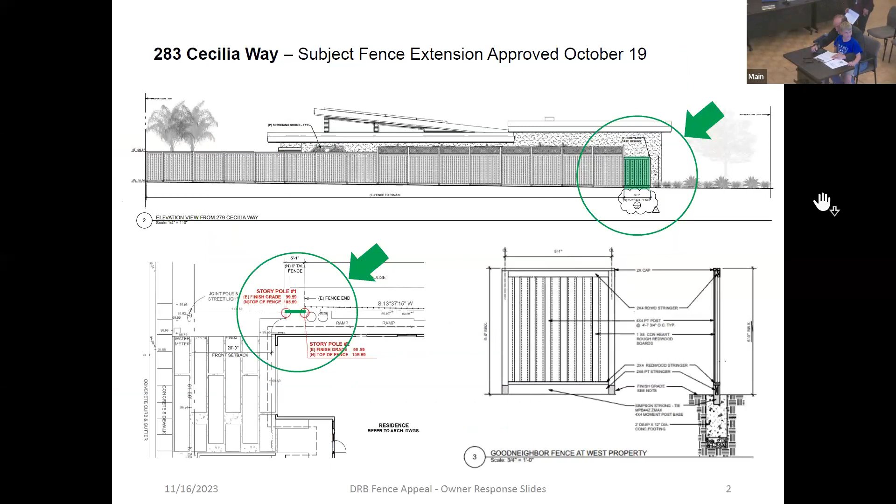So we're requesting a new 5 foot section of a good neighbor fence that's 6 feet tall and matches the fence all around our property. This fence extension is necessary to connect the existing fence to the new side gate approved during the July 20th hearing.

Unfortunately, nothing with our project has been easy. Despite your conditional approval of our project on July 20th, the appellant appealed your approval, requesting that we lower our roof eave an additional 3 inches and move the external hydro loop tanks.

We agreed to both conditions before the September 6th town council meeting, and this slide shows that reduction of 3 inches on the garage side roof.

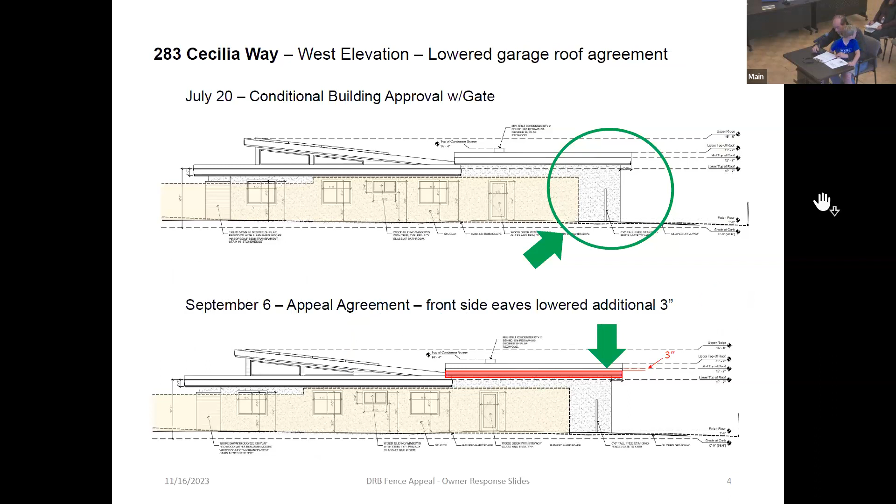This illustration of the fence plan being appealed tonight is in contrast with the variance application that was denied.

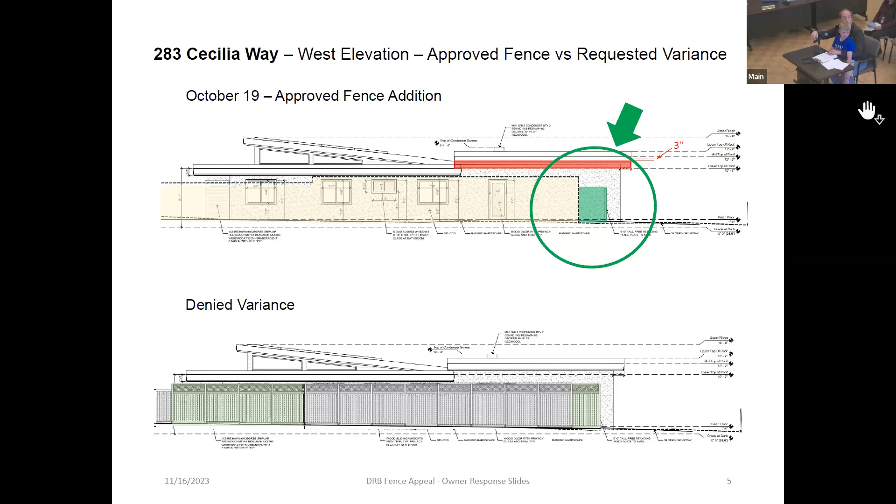So for context, here's a close-up of the area. Actually, I can just say next slide. So here's a close-up of the area taken before our house was demolished.

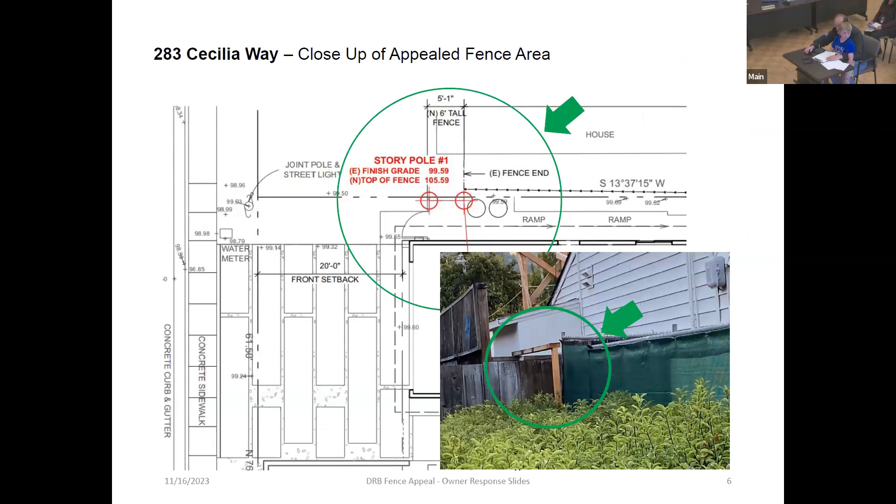Next slide, please. Here's another slide showing the story poles in relation to both the appellant's property and ours. Next slide. Here's another slide showing the story poles in our 2 properties from above, and the area in question is encircled in green there.

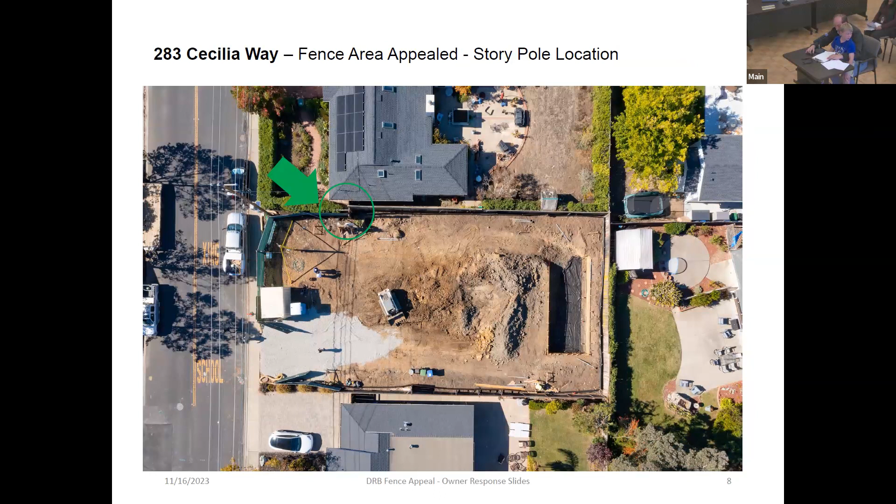And then you can see the taller fence that goes back 48 feet, and then the remainder of the fence behind that. Next slide, please. A closer view of the area in dispute.

Next slide. Once again, the appellant has tonight again complained about another facet of our project, citing design, safety, and noise concerns. Next slide, please. Specifically, the appellant in her long email has highlighted several specific concerns that run around our neighborhood, vilifying our project once again. I'll now address each of these concerns.

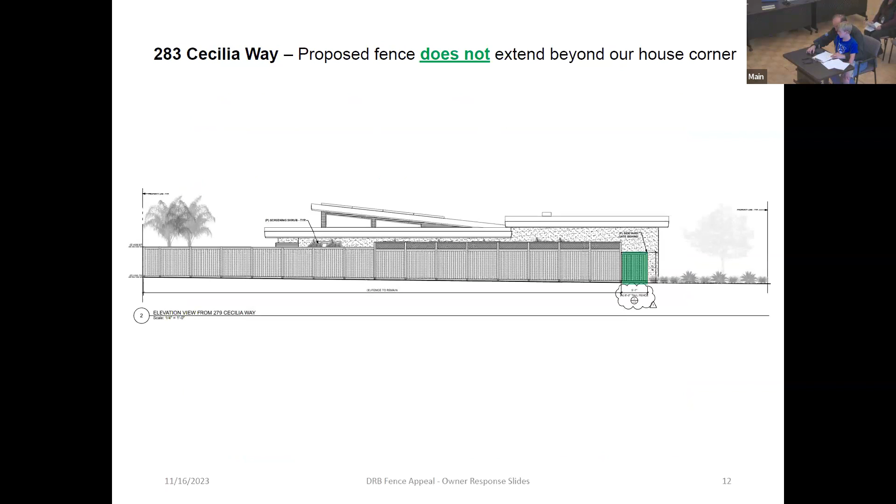Next slide. Our fence extension does not extend beyond our house corner, as she alleged. Next slide. Our fence does extend 18 inches beyond the appellant's house, but this is behind her 5-foot hedge, and it's less than 1.25% of the entire property length, so it's pretty insignificant.

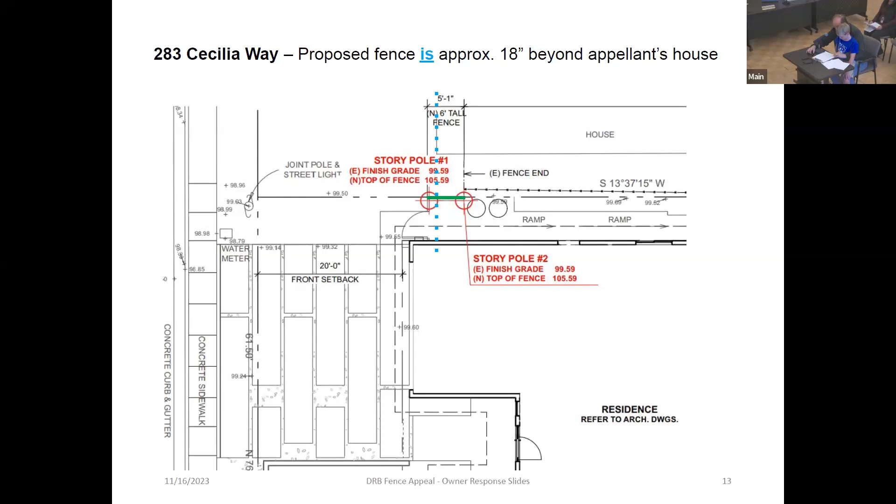Next slide, please. Our proposed fence extension will not be awkwardly tall, as it is here. We drew it here next to what the future house will look like. It will be 1 foot above the appellant's hedge. Next slide.

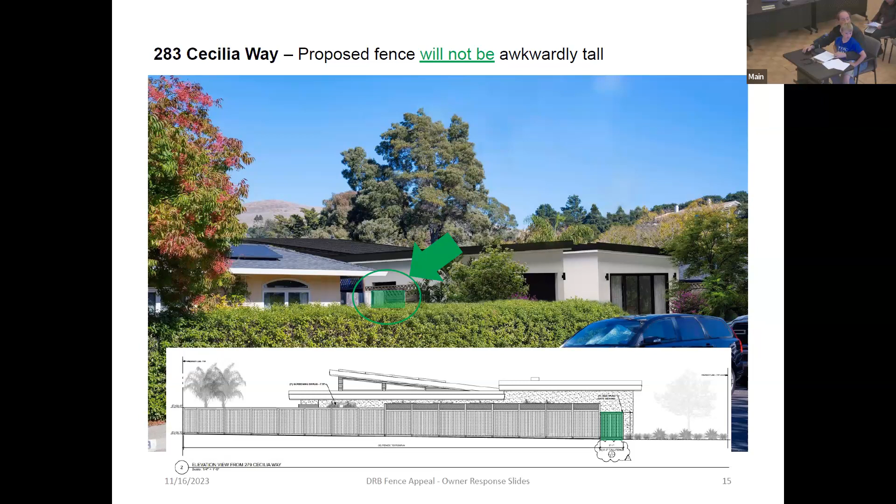It'll be set back one, and it will be 2 feet shorter than the appellant's own fence between our properties, as indicated in the slide below. Our proposed fence extension will not significantly obscure the view of the appellant's side gate from the street more than her own hedge.

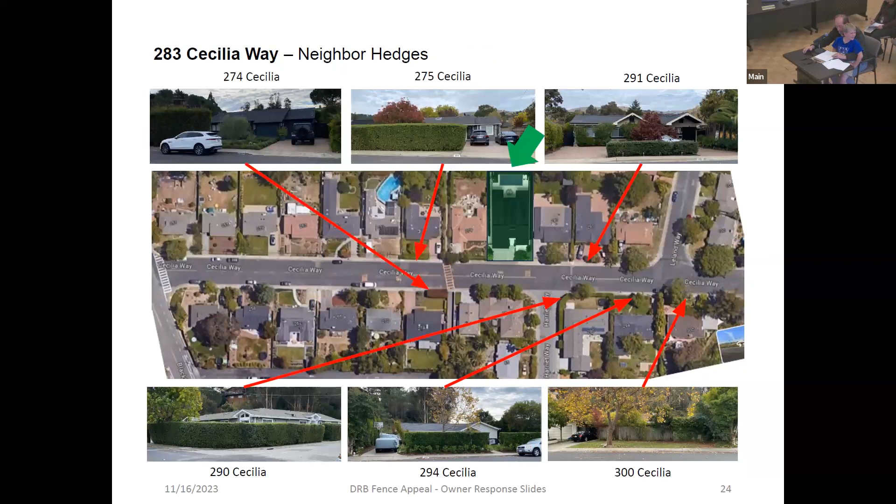This is 300 Cecilia Way. Next slide, 294 Cecilia Way. Next slide, 290 Cecilia Way. Next slide, 291 Cecilia Way. Next slide, 275 Cecilia Way. Next slide, 274 Cecilia Way. These are all properties in close proximity to our own.

As you may recall, the appellant has had countless problems with our project, and now she's concerned about the location of our garbage cans. We've never moved where the garbage cans were going to be on our property since the beginning of our plans. If you may recall, she was concerned about potential sounds from the external Hydroloop tanks we had proposed. During a July 20 hearing, we offered both to mechanically insulate the lids with 2 inches of foam and move the tanks.

Following that hearing, she appealed your approval, citing noise from these tanks again. Consequently, after much discussion among our team, we elected to remove the water conserving Hydroloop system from our program entirely.

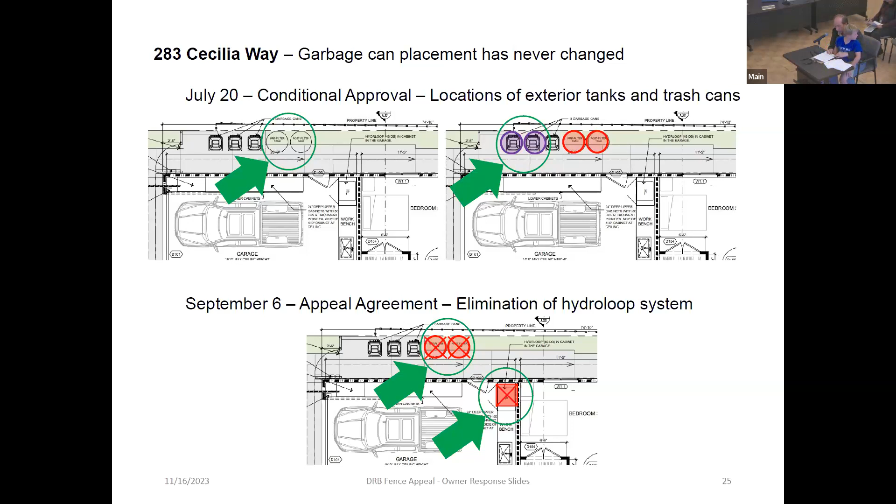I really have no idea what to say about this complaint about our children playing in the driveway from a woman who's saying that this is a family-friendly neighborhood that we're supposed to be protecting.

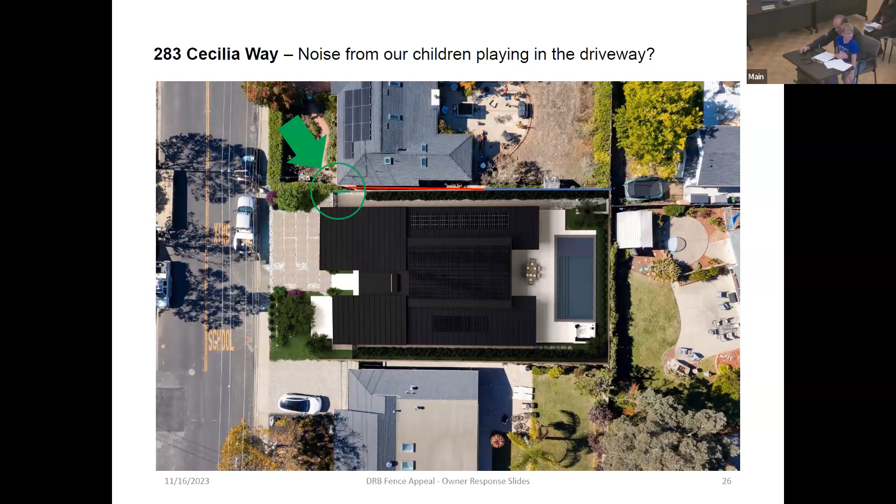You conditionally approved our project. Our project was appealed, and we agreed to our neighbors' change requests again. We applied for a fence variance to address our neighbors' privacy concerns. She blocked that request. We amended our fence application, and it was approved. Now our neighbors are challenging your staff's approval of our fence application.

The appellant's proposed compromises are not compromises, but additional new demands. Her preferred option is to deny the fence extension and ask that we remove our fence back to her fence line, or reduce the proposed gate side fence 1 foot and presumably our gate height too.

We've already purchased the gate. It's being custom manufactured in New Jersey—it's a metal gate, being manufactured right now. That's the 6-foot gate that you approved previously. So this fence is really just linking the existing fence with the gate that you'd already approved.

As I mentioned in the beginning, this should be an uncontroversial matter. So we ask that you please deny this appeal.

Thanks. Next, what's next in the procedure? Oh, do we have any questions? Okay, sorry, we have a question for you. I just had one question.

The story pole right now is not flush with the existing fence—can you speak into your mic? Sorry, right now when I view the story pole, it doesn't look like it's flush to the existing fence, it's offset by like 4 or 5 inches. That's correct, because her fence is not on the property line, it's on her property. So our fence is on the property line, but her fence goes into her own property.

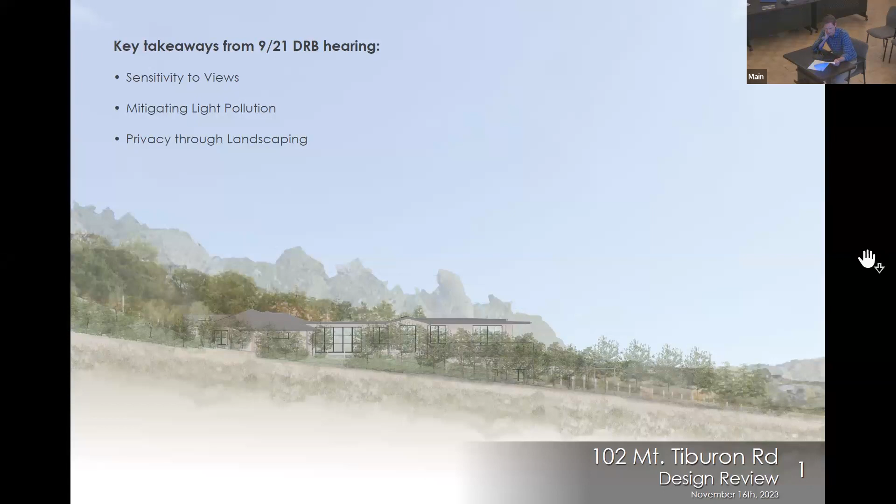I'm also trying to not repeat too much from my first presentation, but with Suzanne being here for the first time, there may be some repetition. I'm fine with that. Could I have it for the laser pointer though? Thank you.

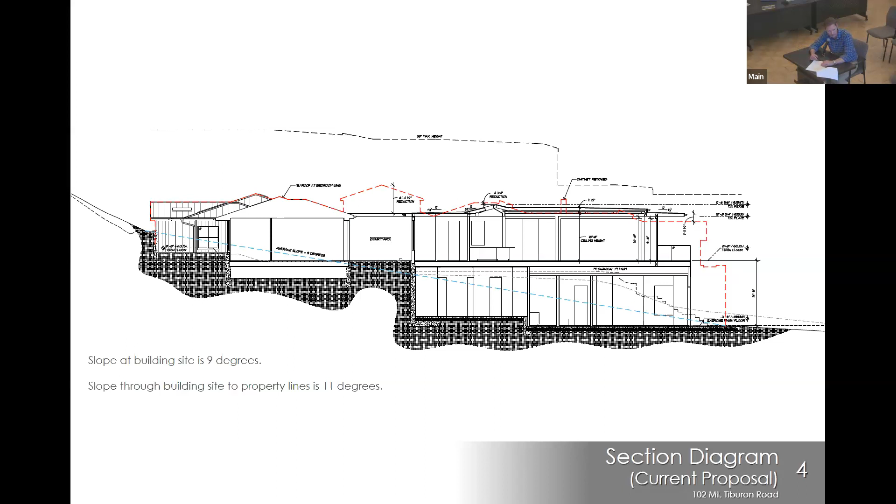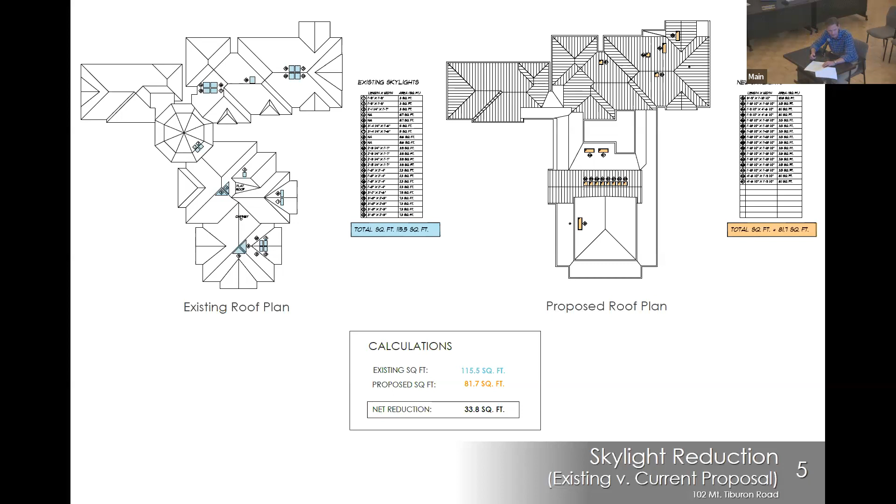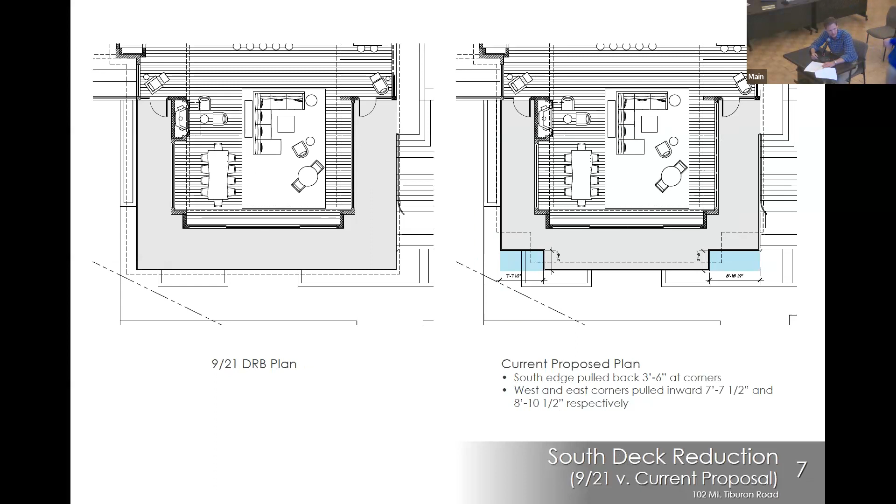We also received letters of support, I'll add, in addition to satisfying the Chu's concerns and a letter that you received from them. We have letters of support that came from 80 Mount Tiburon Road, Mark Evans at 101 Mount Tiburon, and a neighbor at 98 as well. So that's part of the outreach that we've done.

Next slide, please. This is just the two side by side. Next slide.

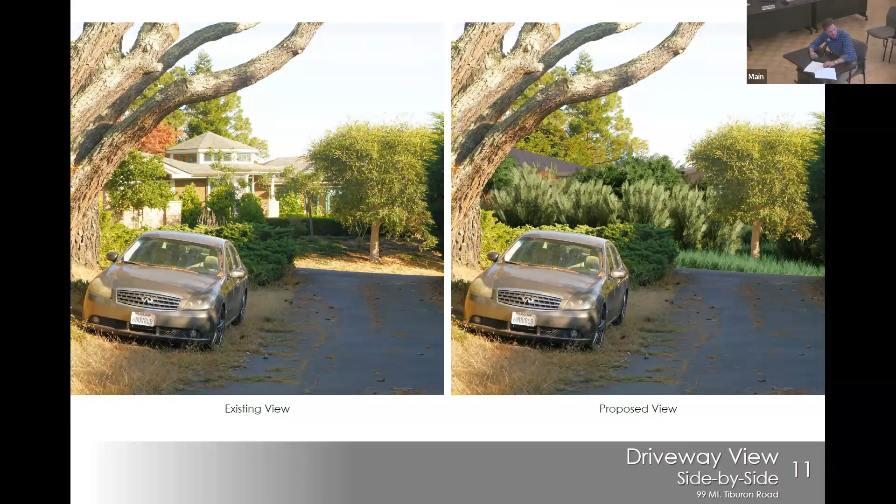Wanted to show a benefit to 99 Mount Tiburon Road as well. This is not something that we really had much dialogue with them about, but the current view looking down their driveway at the property is quite open, quite exposed. Here you can see the very tall tower that we propose to remove, and then the ample screening that honestly is going to be lovely for the applicants. It's something they want, it's not a situation where they're grudgingly doing it.

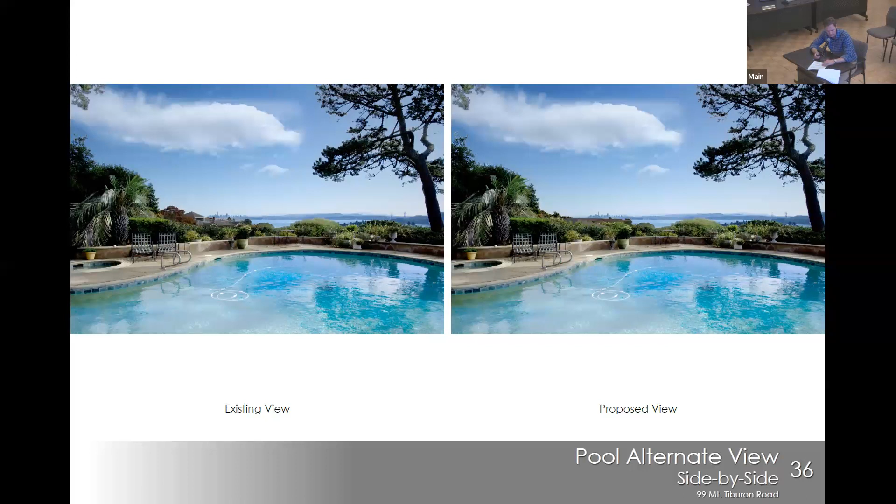These are just side by side. Next slide. And let's go to the next one. This is just side by side.

So I want to close by saying that the main design goal for this project, a real challenge, has been to achieve a cohesive floor plan with good flow. Remodels are a reaction to the frustrations people encounter every day living in a home. For this house, it is the fact that there are stairs breaking up what is a ring of rooms as the main social space. Our clients desire a better space for their young children and see step removal as a major benefit after experiencing several years of knee rehabilitation.

What we have developed and presented is our best effort to maintain balance between those goals with the desires of a neighbor to maintain the portion of the city skyline view they currently benefit from over the roof of the existing home. Our intent tonight has been to take the story pole process a step further and create as accurate an image as possible of how our proposal would change the current view from the neighbor's property.

It is our contention that these images demonstrate not only sensitivity, but also a high degree of diligence and concern to be respectful of the view and transparent in the design review process, to really give you guys an incredible tool to understand and not have to have a hunch about what's going to happen.

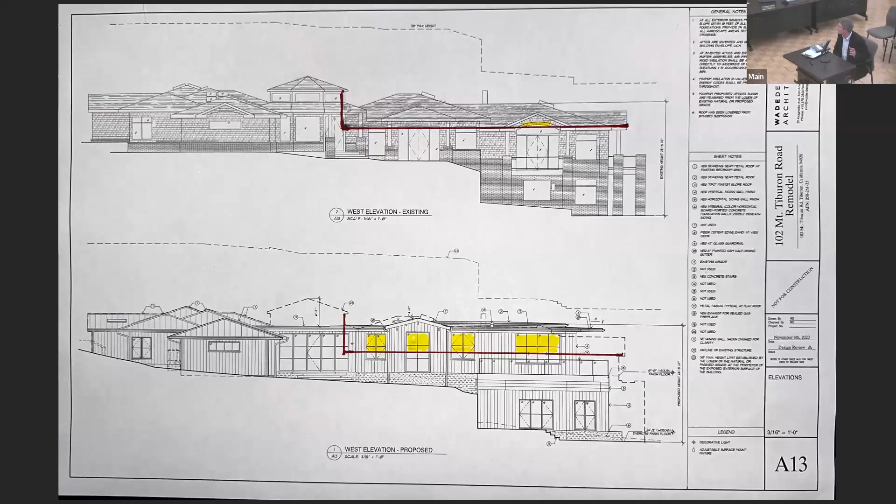This one, yeah. So this is an important concept here. This is the light directed back at the Ordoricio's house because of the change in the design of the roof. And you can see that under the current design, which is a lower roof, part of the part that's visible from their house is roof. Under the new design, the part that's visible from their house will not just be a higher roof, but also these lights, these windows looking in their direction. That's light pollution directly in their direction. It's not about net changes in the windows, net changes. It's about the changes that directly impact the neighbors.

Christy mentioned the solar, and I think that's important. On the existing roof, it would be hard to have solar pointed in their direction, on their north side. But with this flat roof, solar is going to be directly on top of the roof. And it's almost, there's no solar as part of this project, but of course, that's a ministerial part of, they can get solar if they want it without going through this process because solar is encouraged. But here, solar would add more height to a height that already intrudes upon the existing views. These are all important considerations that you should bear in mind, along with what has been hard fought and established in the existing views.

There's been a lot of talk about the cupola that they're taking out. As they said, it provides no value to them and it doesn't matter to the neighbors. Their view is looking towards the heart of San Francisco and Alcatraz. That's the view they've always enjoyed, and that's the view that needs to be protected under the design review guidelines. Thank you.

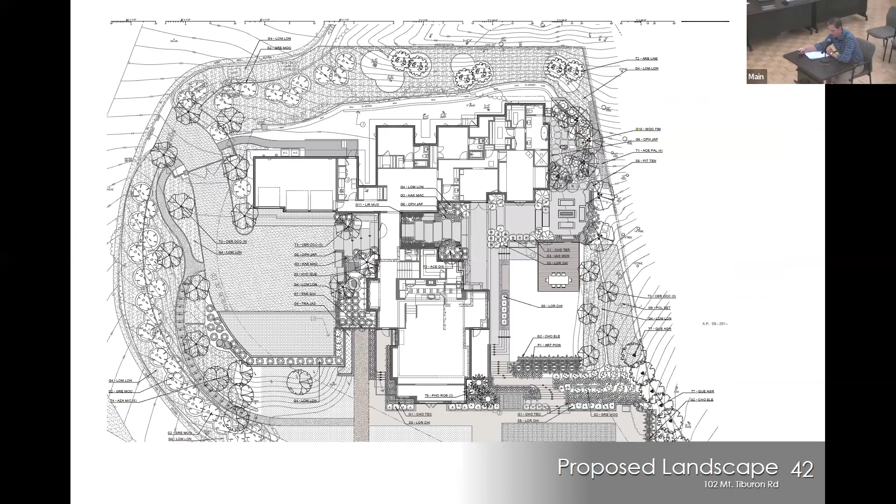Our proposal relies on understanding of trade-offs. This is getting rid of what I imagine isn't something nice to look at, especially with all this talk of light pollution being much higher when they talk about, oh, they're raising the roof 2 feet. No, we're well down—I believe it's 6 to 8 feet below that current cupola height. We're averaging the lower roof lines of this current building.

And like I said, it's an argument of trade-offs. The current view that's afforded is largely of the roof of this existing home, and a flat roof will reduce that bulk. It's accomplishing what our client wants, right?

We actually studied a vaulted roof. We love vaulted ceilings, we love pitched roofs. The view sensitivity here has pushed us to this sort of solution to help maintain the view from 99.

Solar is shown in the package that was sent in, on the roof plan, called out. And if you can go to slide 6, please.

I failed to mention this earlier, but here's the proposed solar location. This is not a new addition tonight—it's in the package we've already presented. It's on the back side of the slope, so as to be respectful of the views, which we understood would be a concern. We can sign up for special clips that make it really low profile on top of the standing seam roof.

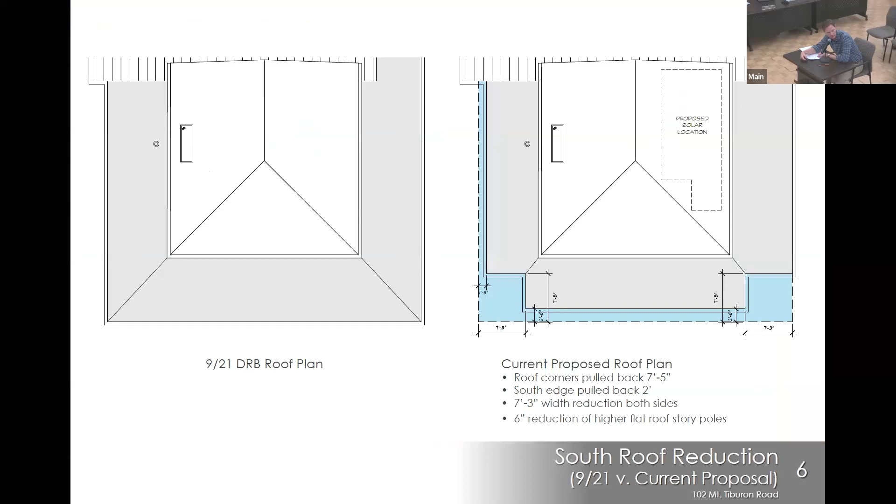Yeah, this is perfect. So here, as we understand from text messages with Gemma Dorcio and our client, these are the concerning windows. We do have ample screening, like our renderings show, that will block those windows, but we are also more than willing to make accommodations to bring down the glass line, to shrink the glass size, like adding an awning here over this window to conceal it from view—a 75 square feet reduction.

If you want to approve of the condition, that's your number that aligns with solutions we've already created. And I think I've covered everything that I heard.

Thank you. Any questions? Yeah, I actually have a question. The skylights—will they be on an automated timing system so that the blackout shades come on?

Yes, Suzanne, we've done this two different ways. One is with a clock, a timer that adjusts with the seasons because it knows when sunset is—so it's tied to that. The other way we've done it is with a light sensor, actually two light sensors, one outside of the building and one inside. So when it switches, there's an awareness between the two sensors that there's more light inside than outside, and it closes the shades.

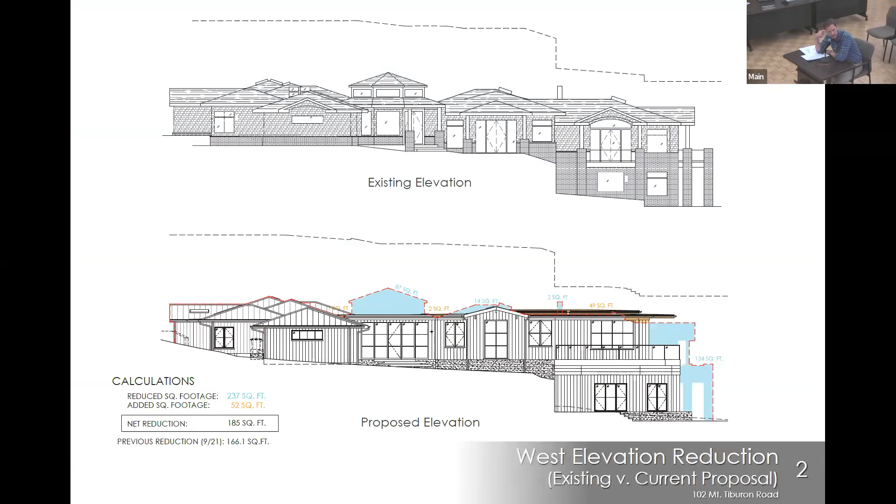What does 75 square feet look like on those three banks? I have an exhibit if the board is interested in looking at it.

I've been told that can cause confusion, but I do have it with me if that's something you'd like to look at. What is the procedure on that? Normally, we need to make sure we have one for the record and that you guys have a chance to look at it. If you want to pause to do that, that's fine as well, but I need to have one for the public record.

I would like to share that, I think that'd be great. I imagine 99 Mount Tiburon would need to see a copy of that as well. Understood—if we could see that, that'd be great.

Sorry, I took all the questions. Do you have any questions? Yeah.

Samantha, if we could scroll back to that slide that had the glazing on it. There we go. So what you're looking at doesn't have the current proposal, it's showing the existing. Okay, separate idea, that's really clear.

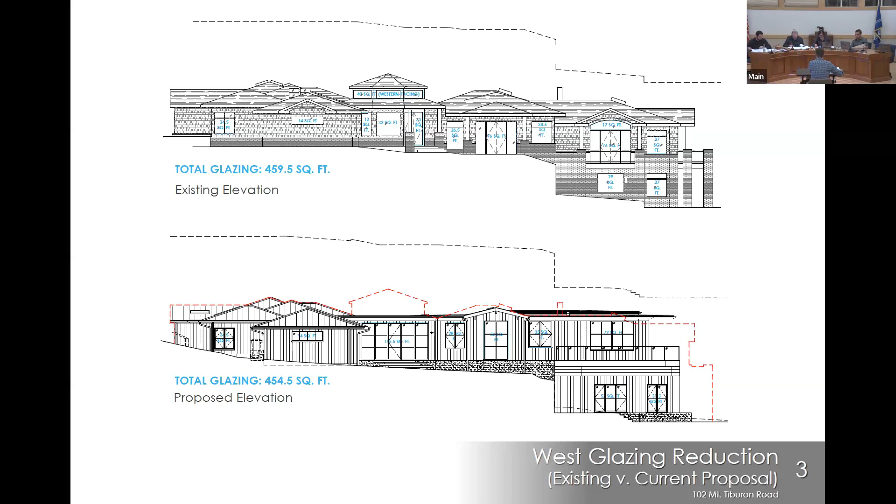And at this time, the design review board is going to deliberate amongst themselves. Who'd like to start off?

You should make a motion to close the public hearing. We should, we are closing. Yeah, I would like to, you just, just say it on the record. Sure. Thank you. Since there are no more, since we have hit the 5 minutes for the applicants and gone through the questions from the board, we are at this time closing the hearing to the public and deliberating amongst ourselves.

Who would like to be starting off? I went first last time. Okay. Jim, would you like to start?

I would love if everybody makes sure they talk into the mic, because when we try to do these minutes, it's sometimes difficult. So I'd appreciate that. Thank you.

I've been up to the site now several times, and I really appreciate the fact that Mr. and Mrs. Pokorny were most gracious to let me inside the house and have a longer look this past weekend.

I still have some major problems with the house. The trade-off, as I see it, is the Pokorny's desire to have a single floor level through the entire house, which is pushing the roof up a minimum.